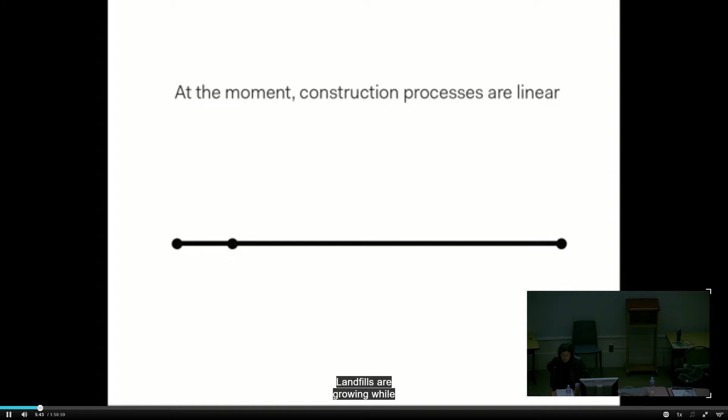Construction and demolition debris is estimated to be nearly a quarter of the national waste stream. Annual C&D is expected to reach 2.2 billion tons globally by 2025. According to the EPA, it has increased by 342% between 1990 and 2018.

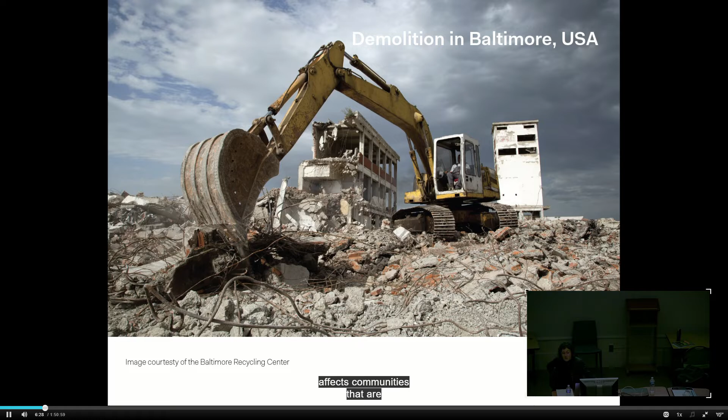That's a lot. We tend to think of the things that we throw away as going elsewhere, but the fact of the matter is that we all share a planet, and the junk that we discard here in the developed world disproportionately affects communities that are contributing much less to this problem.

Meanwhile, the embodied energy in making materials around the world, mostly steel and concrete, accounts for about 16% of global carbon emissions. Embodied energy includes the entire life cycle of the material, so from extraction of the raw material to the manufacture, transportation, and installation of products at the building site. Cement production, which is a key ingredient of concrete and its most carbon-intensive ingredient, has increased almost 30-fold since 1950.

I think our industry is coming around to realizing that operational energy of buildings needs to be reduced, and in some ways, that's the easy part. I think the less recognized, but recently more talked about aspect of our built environment is actually embodied energy of our buildings. It's often assumed that embodied energy of a building is small compared to the energy used over its operating lifetime. However, if you assume, as an example, a house built to normal operating efficiency, the amount of energy needed to build that house equals the amount of energy used in operating it for about 20 years.

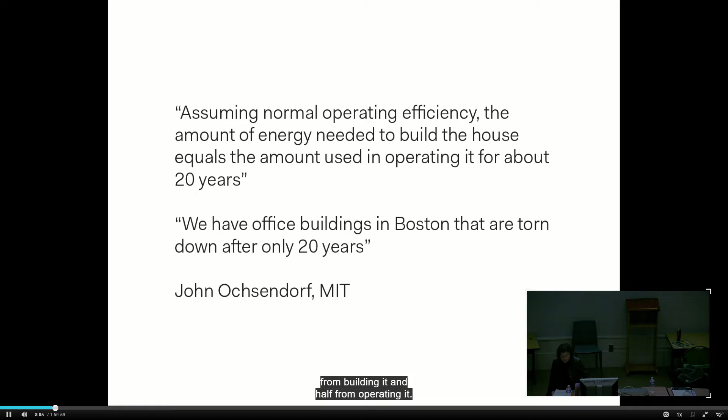In other words, if the house lasts 20 years, the total energy consumed is half from building it and half from operating it. The conclusion that we draw from this is that it's essential for us to pay attention to both the embodied and the operational energy in order to have a real impact.

We have to design our buildings to operate to zero, or as close thereto as we can get. There's no doubt about that. But in doing so, we have to pay attention to how we're achieving that goal. If we create a passive house that operates at 10% of a quote-unquote standard building, but achieves this by packing it with foam and spraying the inside with spray foam, I think we're missing a large part of the point. If you have to wear a hazmat suit to install something, chances are it's not very good for the occupants of the building or for the environment.

Foams are petroleum-based, and eliminating the extraction and use of petroleum will be critical in reaching the carbon emission goals, the toxicity of the stuff aside.

This is the Union Carbide building on Park Avenue in New York City. It was built in 1961. This steel and concrete building was the tallest building ever to be built by a female architect, Natalie de Blois of SOM. In 2011, it was completely renovated to LEED standards.

And in 2019, only 8 years after its renovation, it became the tallest building in the world to ever be demolished.

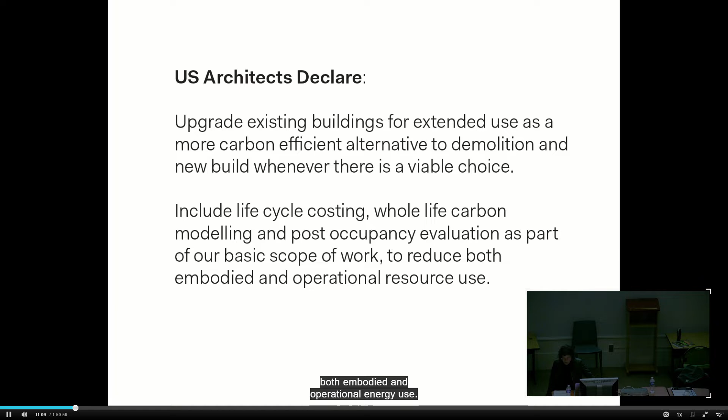So as an industry, we have significant problems to solve. We need to stop depleting resources at a faster rate than we can regenerate them. We need to be aware of the energy that goes into making new materials, some more than others, and we need to curb the mountains of waste that we are adding to yearly, weekly, daily.

An article I read a couple years ago by Rowan Moore for The Guardian, entitled 'Where are the architects who will put the environment first?' really resonated with me. I'm going to read a quote. Architects are still trained from studenthood to perform in what Steve Tompkins, one of the driving forces behind Architects Declare, calls a competitive and individualistic profession. They get more glory for designing a singular new building than they would if they worked out a good way of insulating old houses. Yet as most of the building stock of the future is already with us, and as demolition and rebuilding entails the chucking away of whatever went into making the original, the latter is likely to be more useful than the former.

So what if we start seeing our cities as material mines, as a rich landscape that needs to be adapted to take us into the future, to be resilient to all that it will bring?

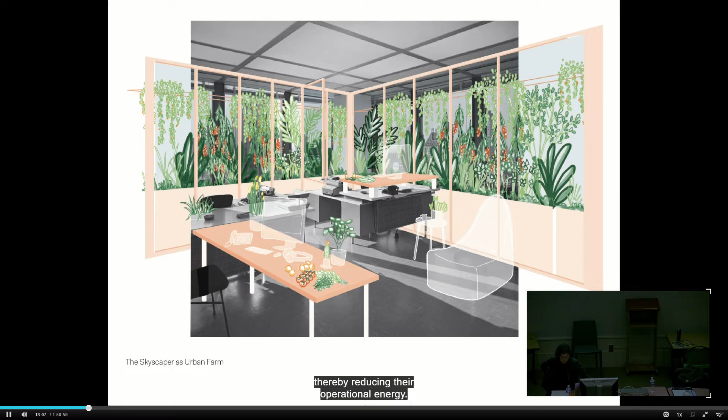Each building within our city, no matter how beautiful or ugly, is a treasure trove of embodied carbon that should be utilized. We can't afford to scrap it all and start over.

We need to use our ingenuity to reinvent and reuse and redefine and adapt. And as we do this and we carefully take them apart to fulfill new uses and improve their operational efficiency, we need to be aware of what we're taking out. Where can it go? What useful life does it have left? Maybe another industry can use it, even if it has become useless as a building material.

We can then take this a step further and start thinking about demolition and deconstruction when we plan things, letting go of our egos long enough to understand that nothing is permanent.

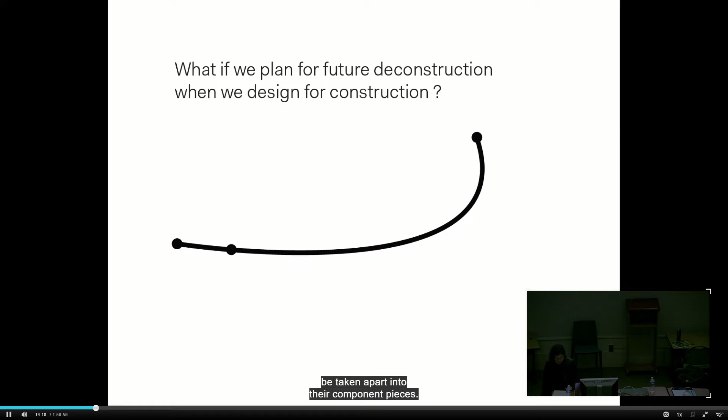And what if we start planning for this impermanence and we designed in a way that things can be taken apart into their component pieces? Then maybe instead of this, every time you want to move a wall, we can conceivably plan for the wall to be shifted, to be taken apart and put back together in the new desired spot.

So if we start planning for a future adaptation, we can start closing the loop and ultimately reform our linear construction practices into circular ones.

So this is a shot through the window of an adaptive reuse project we completed in the summer of 2021. The project sits in a low-lying area of Brooklyn around the Gowanus Canal, which was once a vital cargo transportation hub for Brooklyn. The area is built up of a network of factory and warehouse buildings that primarily date back to the late 1800s.

Recent zoning changes around that canal have meant many new 10-story buildings have been erected. A lot of the old buildings are being torn down.

This is our site. It's 100 by 100 feet, and comprised of a quarter of what used to be a compound of 3 connected buildings, which formed the Royal Metal Furniture Company. The building dates to around 1900 and is a single-story masonry exterior with 2 lines of 50 by 100 heavy timber roof trusses, columns, and girders.

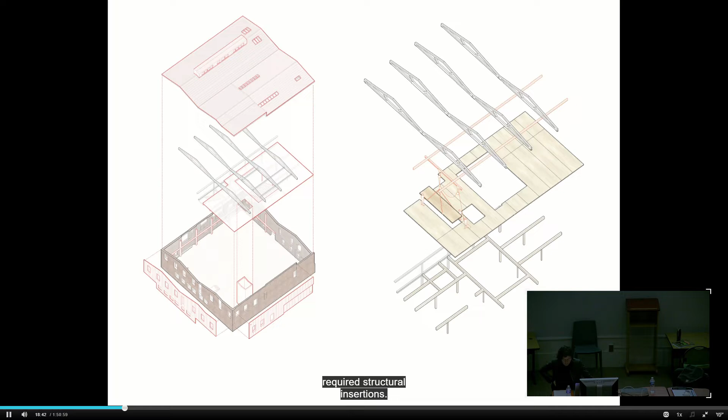And so we decided to use mass timber for the required structural insertions. So CLT slabs and glulam beams and columns sourced from sustainably forested vendors within North America were installed in one half of the building. The material allowed for large column spans and an open layout that worked well with the programmatic requirements. Also, it allowed the heavy timber trusses to remain unaltered and exposed.

To our knowledge, this project represents the first use of CLT on a fully commercial adaptive reuse building in New York.

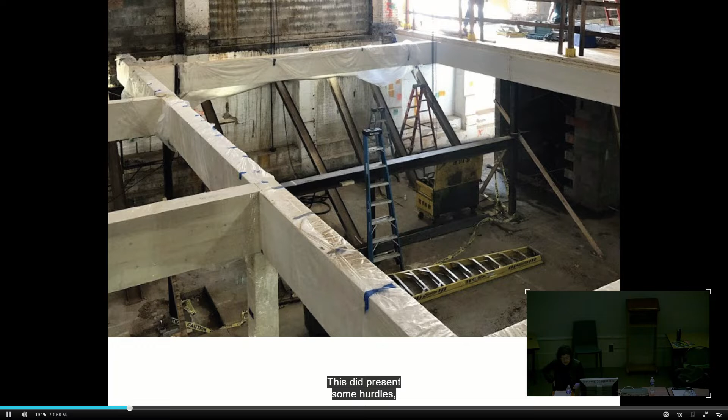This did present some hurdles, including the fact that the GC had never worked with this material before, and we were installing it in an existing building with the existing roof and trusses to remain in place, which meant we couldn't just pancake the slabs, but instead used the existing timber to support a gantry crane, and then we slid the CLT slabs into place through an existing opening in the masonry on the side lot.

The CLT panels then fit like puzzle pieces within the existing building and were scribed to the irregularities of the brick walls.

One benefit of using CLT in an existing structure is that it was protected from the elements from the get-go, and it was also relatively quick to install. They managed to install about 2 to 3 panels in a day, which meant the entire new floor was installed within a week.

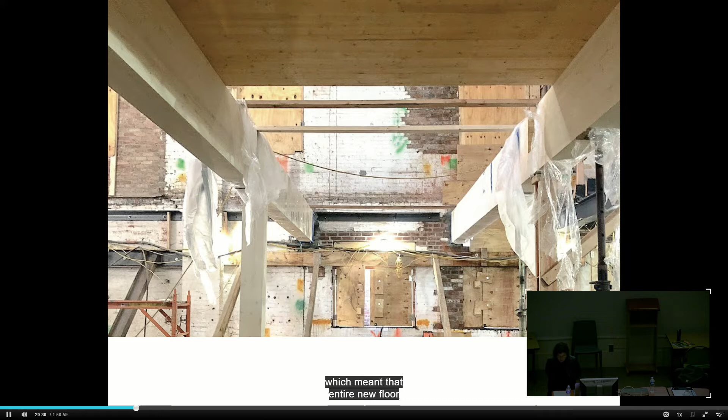Here is a view of the Bleacher Staircase. You can read the CLT slab in the edge above the newly inserted glulam beams around the opening, which we purposely exposed in detailing the glass railing, and 2 new skylights, which were inserted above the space to bring natural light deep into the heart of the building.

This bleacher space connects 4 rehearsal studios and serves as sort of the market square of the building, hopefully fostering unintended conversations and creative collisions.

I've had the pleasure of going back to the building since it's been in use over the last year, and it's been the most fun to me to see that the way this space was intended to be used is actually how the artists are using it. So there's people lying on bleachers, working, having conversations. It's really great to see it active like that.

This is a detail shot of the edge of that Bleacher Staircase. We really wanted the CLT buildup to read clearly as you descend into the lower level. And you can also read the acoustic sandwich, underlayment, 3 layers of plywood, and then the finished floor, which ensures that there is no acoustic transfer between the floors.

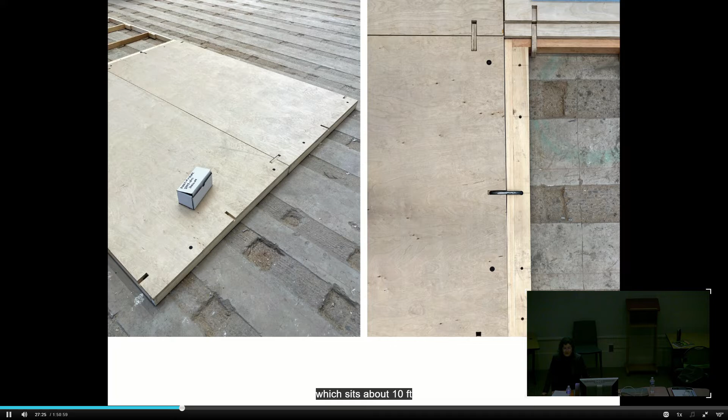Since the building is located near the Gowanus Canal, a low-lying area of Brooklyn, the owner wanted to be prepared for big flood events. The wood floor in the big assembly space, which sits about 10 feet below street level, is made up of demountable panels that are each 3 by 6 feet. In the case of a flood event, these panels can be pulled up and stored at a higher level, meaning the water can come in and recede without doing damage to the finished sprung wood dance floor.

Since the space was used for dancing, jumping, and performances, it was important for the floor to be a proper dance floor. We did a lot of research into demountable options that could be purchased, but most of them came with a vinyl finish that would have hid all the fastenings. The owner really wanted the floor to be wood with a seamless finish, so we collaborated with a local set building shop in New York to custom fabricate them. In the end, you can't tell that these panels are demountable. It looks like a seamless floor.

So this project starts touching upon some of the elements I talked about early on. It introduces elements of circularity in the reuse of the building, in the reuse of materials, and in the use of carbon-storing CLT and glulam instead of carbon-intensive steel and concrete. It's also starting to think about demountability in the context of resilience and reuse rather than waste.

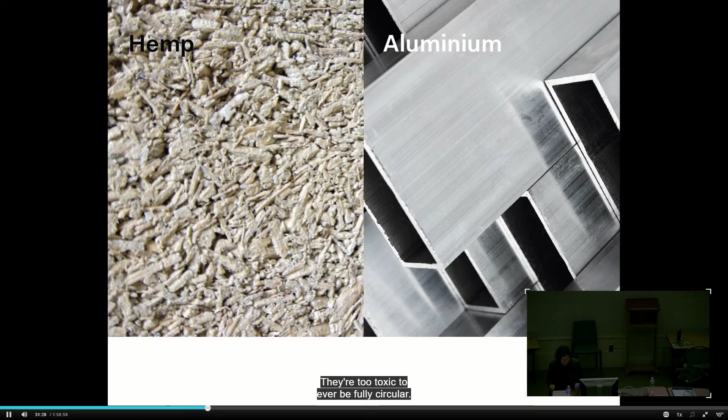So these cycles and loops of production exist at several scales. At the building level, there's a loop that we already touched upon: building components are designed for disassembly, and components are sent back to manufacturers for reintegration into their assembly lines. Distance and travel end up becoming a relevant component when we start thinking in circles, and as such, condensing them becomes important. So thinking in hyper-local circles, with the idea that one company's excess or one company's waste becomes another company's ingredient.

So CoAdaptive actually launched this year a construction management arm, CoAdaptive Building. Our desire to start an architecture-led design and build practice is in large part informed by the fact that we want to have a more direct impact on the material waste streams for the projects we're renovating, so that we're prioritizing careful deconstruction rather than demolition, to ensure that whatever is removed is either reused or sorted for down- or upcycling.

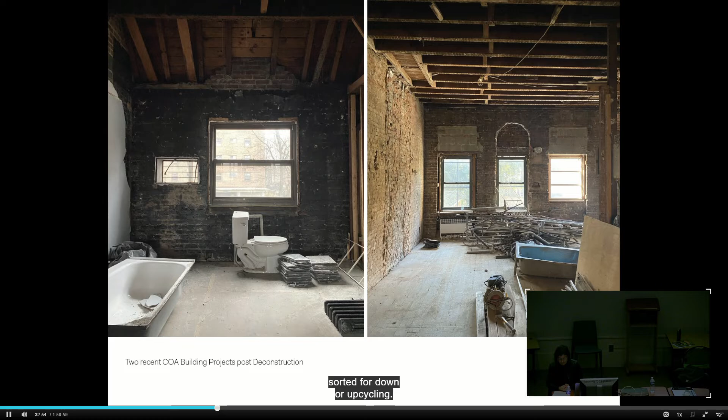As mentioned before, reusing as much of the existing building in situ is the best way to keep all that carbon locked into the built environment and to not generate waste. But much of what does need to come out probably still has usable life in it.

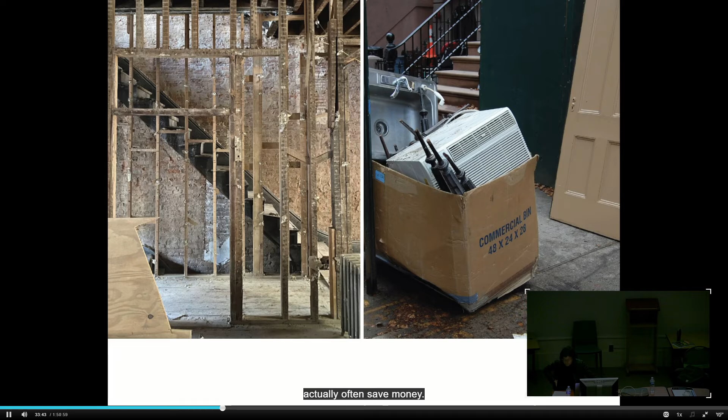One person's trash is very often another person's treasure. So we have all these items picked up by partners and donated for reuse. A great perk of this is that there's tax deductions to property owners, and those often offset the additional cost of deconstruction over demolition and actually often save money for them.

So we recently made a sign for one of our projects undergoing deconstruction to explain to passersby what's different about this project, what's different about the process of deconstruction rather than demolition, in the hope that it catches on.

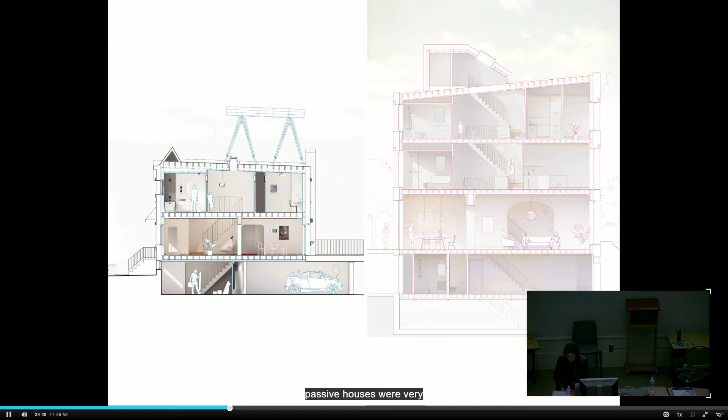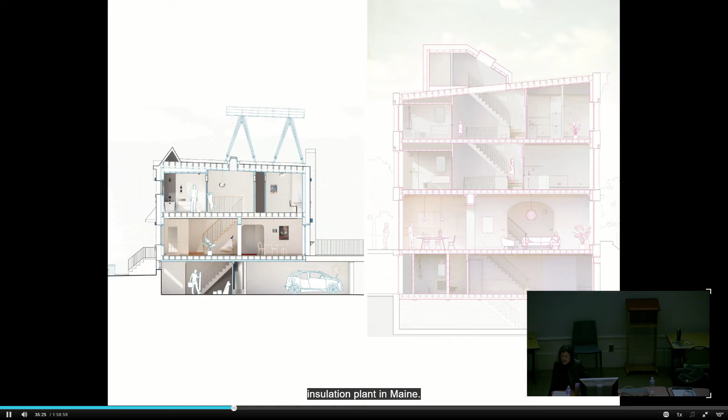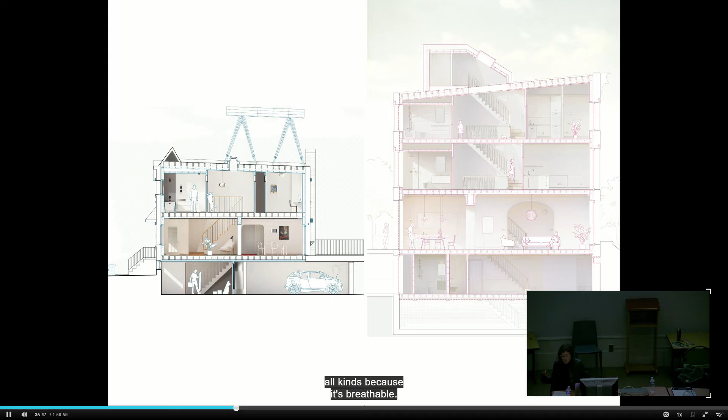So when we retrofit existing buildings to be passive houses, we're very conscious about what we add back in. Insulation is one of the materials we use significant amounts of in high-performance retrofits. It should be natural, it should be breathable, and it has the opportunity to be a carbon sink. We're big fans of wood fiberboard insulation, which we've traditionally needed to import from Europe. But we're super excited, there's a company called Timber HP that's going to be opening a local wood fiberboard insulation plant in Maine. Wood fiberboard insulation comes from the waste product of the wood industry, and all the properties that make wood a fantastic material generally also make it great for insulation. It's superior to foam of all kinds because it's breathable, it can handle moisture, and there's the health of making it and what happens to it at the end of its usable life.

At CoAdaptive, we made an internal pledge in 2019 to avoid foam of any kind at all cost.

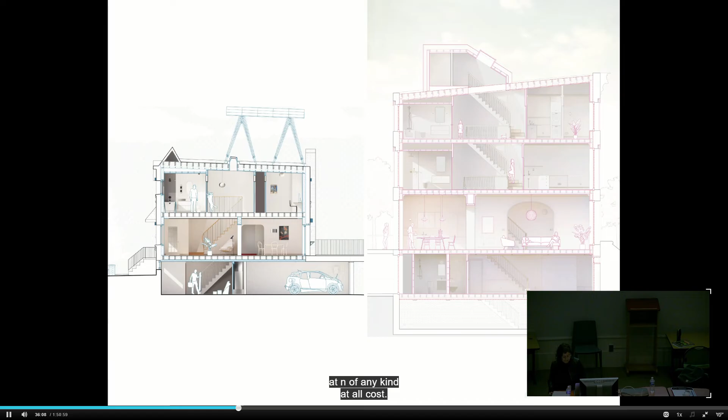So we want to consider the materials that we specify for our projects very carefully to work towards this idea of circularity. And any new materials we do use, we're constantly researching new low-carbon alternatives to the current status quo.

One thing we're really excited about is the use of hemp and hempcrete for exterior walls. They're created from a completely natural mix of hemp, lime and water, and they provide insulation rates up to R70. But by themselves, unlike concrete timber blocks, they're not structural, they work with an internal post and beam system. Unlike concrete blocks though, they are carbon sinks and they're vapor open, which allows moisture transfer between and through walls. That way we can control humidity and temperature better. This is particularly good when paired with passive house principles. They're also fire resistant and acoustically absorptive.

Cork is another one of these materials we're really excited to use. We're currently working with it on an enlargement of an existing retrofit where we're using it for both the insulation and the exterior cladding. It's extremely waterproof and erosion resistant, and it also has beautiful aesthetic qualities over time. Cork is harvested from trees without harming them, which makes it naturally regenerative.

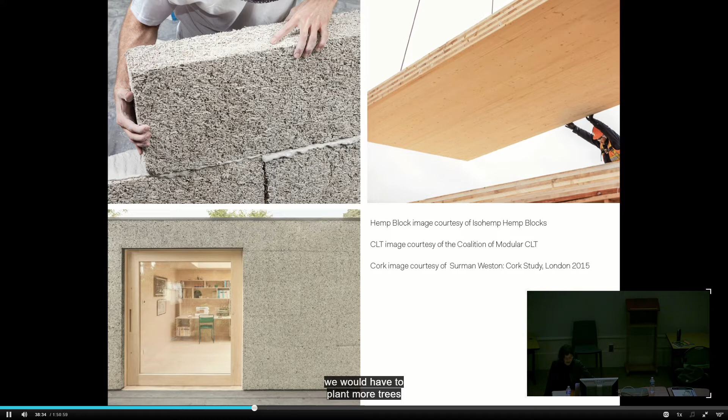It's harvested by stripping the outer layer of the skin of the tree, which then regrows over time for the next harvest. In the factory, the cork is shredded and compressed at high temperature, which causes it to expand and the natural saps to melt, binding it together as a glue. Once it's cooled, it's ready to cut and measure. So we feel an increased demand in cork would mean we'd have to plant more trees, and that could only be good.

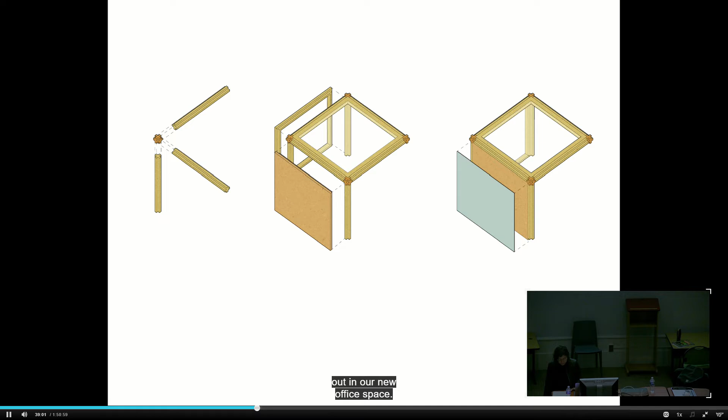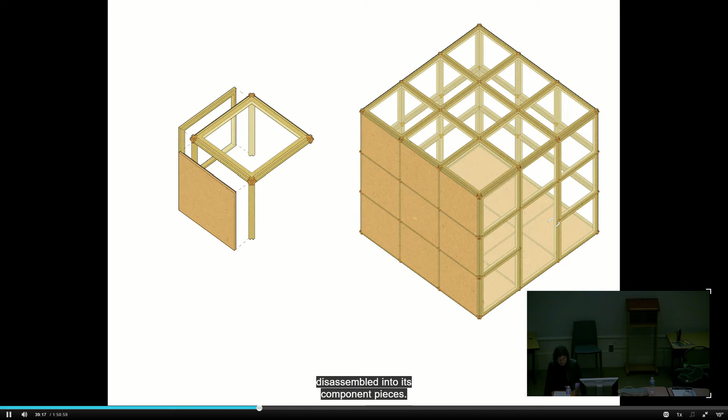So the next evolution for us at CoAdaptive is to start thinking about disassembly, designing things so that component pieces can come apart and be reconfigured if required. We're working on a panelized wall system at the moment, which we're prototyping and building out in our new office space. The system relies on a wood frame and easily mountable inserts made from wood and wood fiberboard. There are no adhered components, so everything can be disassembled into its component pieces. The modules are about 1 meter by 1 meter, which means they can be carried by 1 to 2 people, really important for an adaptable retrofit solution.

And then we're layering them, as I said, from wood and natural insulation, with glass inserts as needed, so that they become versatile with the material that you adhere.

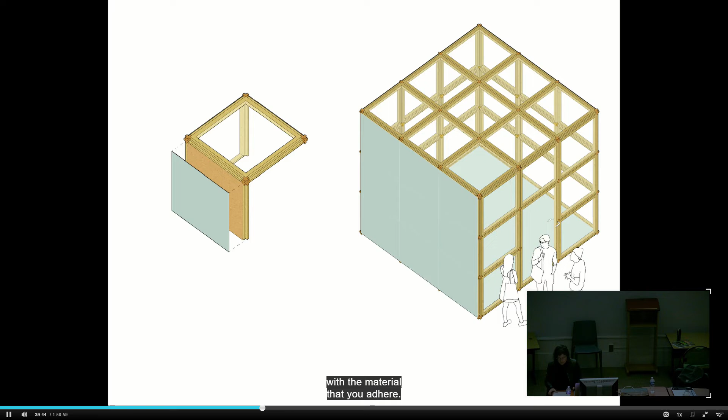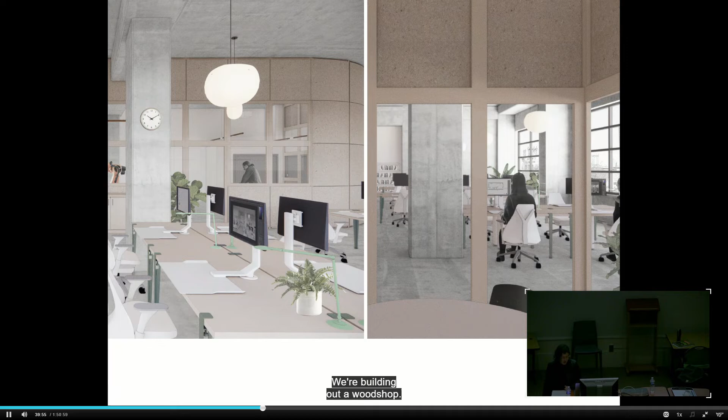These are some renderings of our new space in the Brooklyn Navy Yard, where we're building out a wood shop. In that wood shop, we'll be prototyping those panels and showcasing them in our space.

If we start moving towards a circular system, we can conceptualize borrowing man-made materials rather than owning them outright. So our metaphor of the city as a mine really becomes one of a material library.

If manufacturers are held accountable for the entire life cycle of their products, it would increase maintenance and quality of products, and it could change economics of ownership, leading to more access and affordability in construction.

As you can maybe tell, we're passionate about this, but we're ourselves always on the path of discovery, so I'm curious to hear your thoughts and comments. I think as the next generation of architects, it is your job to interrogate the status quo and make it your mission to hold the older generations accountable. So thank you for having me.

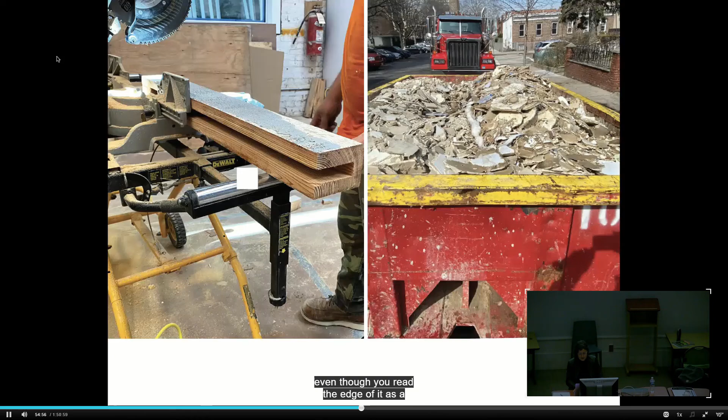So the plywood, actually, even though you read the edge of it as a solid - let me see - yeah, even though you read that solid edge, there's actually voids, and then there's some springs, so that it's like a bouncy system. So it's not solid all the way through, no, but it reads solid at that edge. What is the layer that separates? Oh, it is a recycled rubber mat. Yes, it is plastic. We actually looked at using cork for that. I can't remember the reason why we didn't go cork.

But I asked this question at a talk a couple of weeks ago. I have this fundamental question of, we have all this plastic around us. We know that it's not healthy, and we don't want to build with it, but at the same time we don't want to just stack it up - it's never going to rot. So what do we do with it? This particular material was made from recycled rubber that comes from old tires. There's lots of those, but it does off-gas, and it's still not great.

How far does it span? Oh, that was your other question, right. I think it's 40 feet. So this is a 5-ply CLT floor, which you can sort of read, and then it's our acoustic underlayment, that rubber floor, and then it's a sprung wood floor, so it's the plywood, and then the finished floor on top. And the depth, I don't know - I think it's about a foot, a little bit more maybe, 13 inches.

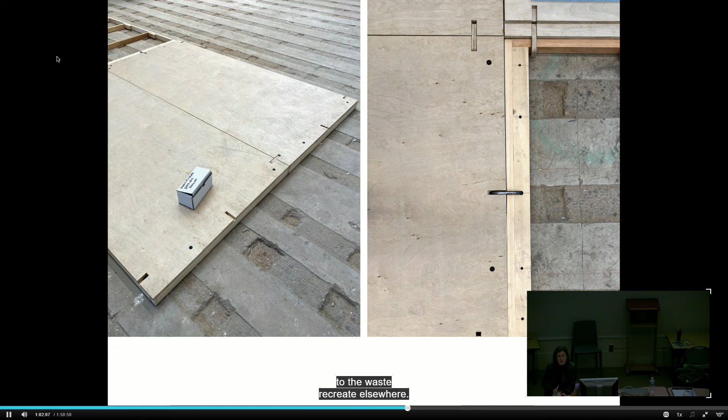That's a great question, and I think the answer, unfortunately, at the moment is that it's more expensive. But I think there's a cost we're paying that's not currently being taken into account anywhere. If there was such a thing as a carbon tax, or a monetary value to the waste we create elsewhere, that would even out that equation that unfortunately is still imbalanced. I think that's actually one of the biggest hurdles in making it less expensive and becoming a solution that's more widely adopted. Because yes, at the moment, it's much easier to tear something down and start over because it's cheaper and easier. I think there's things we need to do at the policy level to maybe change that equation monetarily.

So what is the limiting cost, like following on that question, what is the limiting cost factor?

I don't know if it's one thing, it's everything combined. You know, this building, the roof was starting to fail, there was water coming in. The brick was deteriorated, so there were areas where we had to carefully remove, reinstate, and refinish. One of the other interesting things is that because this building was part of a bigger metal foundry, all of the plumbing systems, the sprinkler system, the roof drainage, were all tied together with the neighboring buildings that were now under separate ownership. So part of this project was also to peel everything apart and give this a new identity, separate from the systems of its neighbors. So all those things, I don't know what makes it more expensive, it's sort of all those things. You're working with something that isn't plumb, it's not straight, so it's not as easy.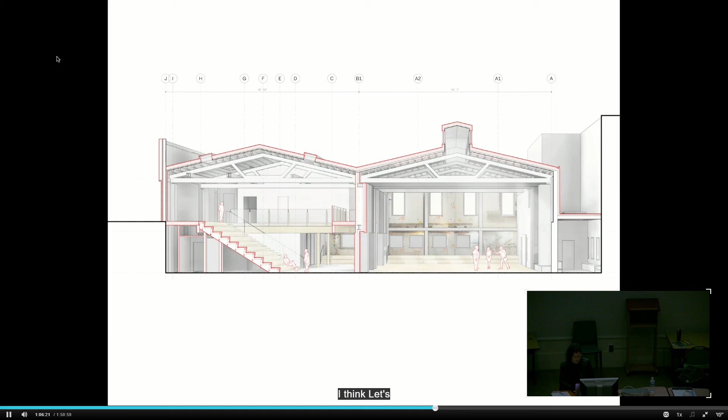No, to your point, we haven't had to do new foundations very much. We usually work with what's there. It's one of those tricky things, but I'm not against concrete per se. I feel like it's one of those things that will last a really long time. I think it's just about respecting that and extending its usable life for as long as we possibly can when we do use it.